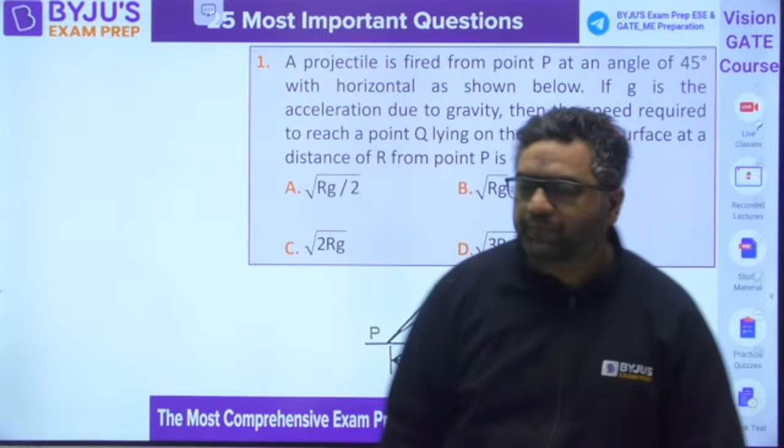So guys, now we are having the first question. This is from engineering mechanics, from projectile motion. This is the PYQ of GATE XE paper only. So you can try and solve this question.

This question says a projectile is fired from a point P at an angle of 45 degree, as shown, this angle is 45 degree. They said that if g is the acceleration due to gravity, then the speed required to reach a point Q on the horizontal surface at a distance r from the point P.

That's great, Ajay. What about you, Shreyas?

Here I would like to tell you, in this question we are going to use the formula for range. Very good Ajay, I am happy to see that. Hope you guys would be getting good marks, good rank. So I feel there was nothing in the exam which you were not aware of.

You can solve it guys and give me the answer for the first question. Then we will be starting the next one.

Yes everybody, what would be the answer for this? You need to apply the formula for range. Do you know the formula for range?

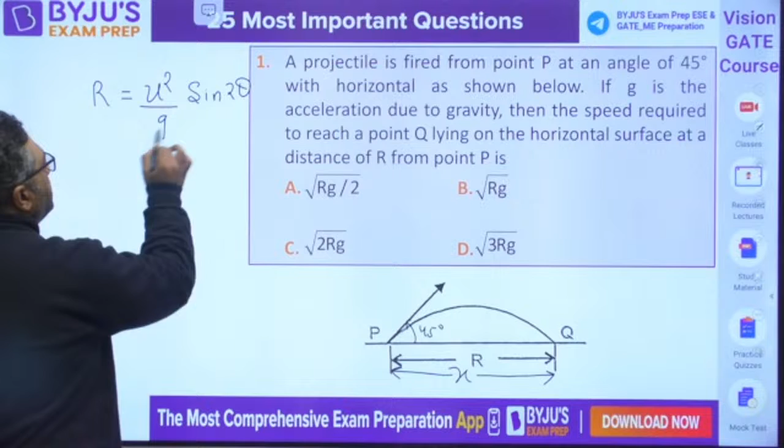So guys, when we are talking about u square sine 2 theta divided by g, it is not 2u square, it is u square sine 2 theta by g. When we are talking about velocity, they have given it as v naught. When you put this value, you would get r, which is given to us. A projectile is fired at an angle, and you need to find out the speed only. So you would be getting gr divided by sine of 2 into 45 degree.

So I feel the answer will be coming out to be what? I feel it will be coming out to be B.

Yes or no? Please tell me, guys. Is it correct? Please tell me.

And if you have any doubt in the formula of range, you can also use S equals ut plus half at square. When you use this, you know that in the x direction we are getting the range, so S comes out to be ux into t. You can write ux as u cos theta, and t is the total time of flight.

For the time of flight, you know the total height is h. Using the y direction, s equals 0, s equals ut plus half at square. When you solve this, you get the time of flight, since in the y direction u is u sine theta. So you need to find the value of t, put it here, and you get the answer as u square by g sine 2 theta.

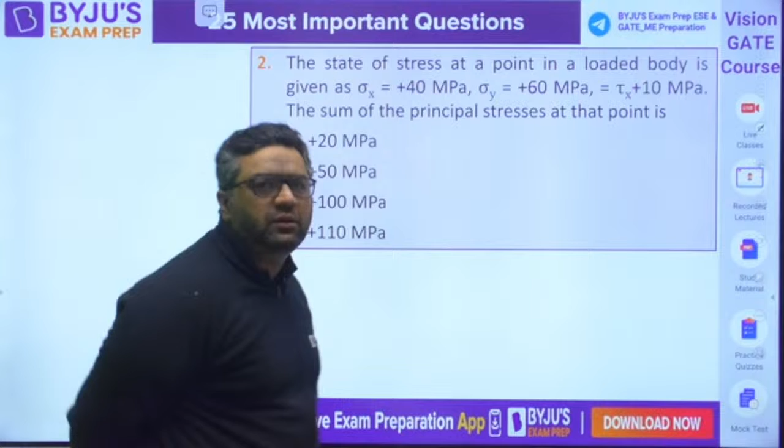Okay guys, the state of stress at a point in a loaded body given as this, you need to find out the sum of principal stresses.

Thanks, Moodley, for your wonderful words. This is just by God's grace. Whenever we are going to do this, we look at the syllabus and the previous year's questions based on that.

Jisk is saying 100, Ajay is saying C. Answer is C. How will you do it? You know that sigma xx plus sigma yy, sigma 1 plus sigma 2 equals sigma theta plus sigma theta plus 90. This property tells us that the summation of normal stresses at any two planes perpendicular to each other is always going to be the same. So 60 plus 40 is going to be the answer, which is 100 MPa. That's a very good question.

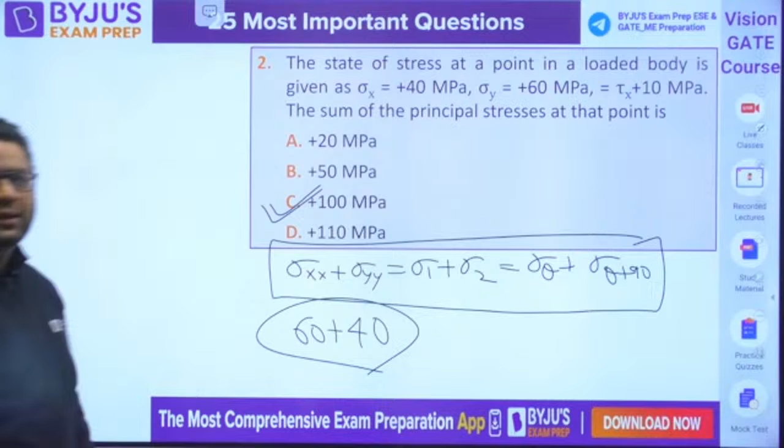Moving to the third question, this is once again from strength of material. Very good, Divit, this is strength of material once again.

An L-shaped elastic member with flexural rigidity EI is loaded as shown in the figure. The total strain energy in the member due to the loading is, these are the options.

When we are talking about this, it is going to be P square B square. Let me correct it, this is not 6, this is B - don't take it as 6, this is B. Yes, try to solve it now.

That's really great. I did not see that actually till now, but that's really great. Solve it, guys.

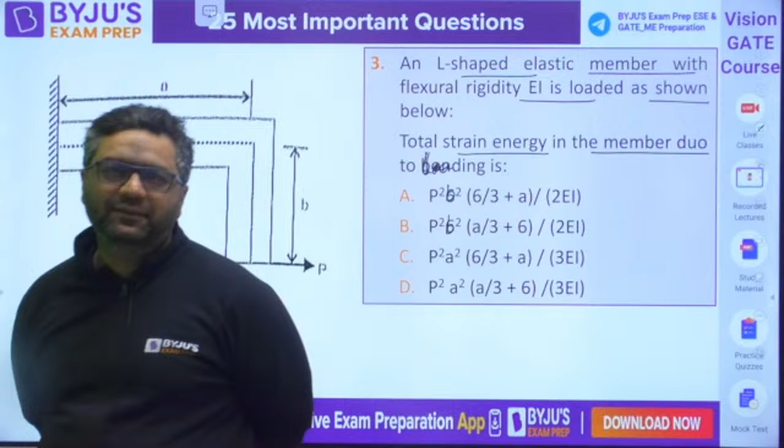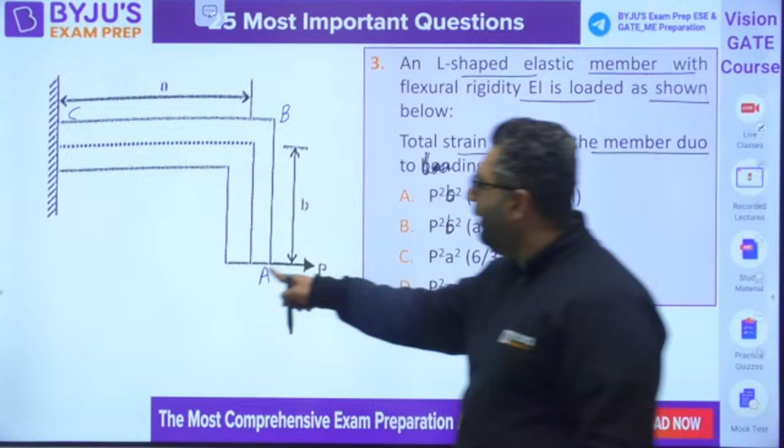Maybe in XE also you get these questions. So guys, here you need to find out the total strain energy in the member due to loading. So you know that this is A, this is B, and this is C. Strain energy total is U of AB plus U of BC. This distance is B, this distance is A.

When I solve this, you know that when you take a section like this, section 1-1, for this section M11 is going to be P into X. So you need to solve it, guys.

Then you can also have M22. For M22, you apply one force here, another force here. This and this will make a couple like this, P into B. Then you find out P into B is the moment.

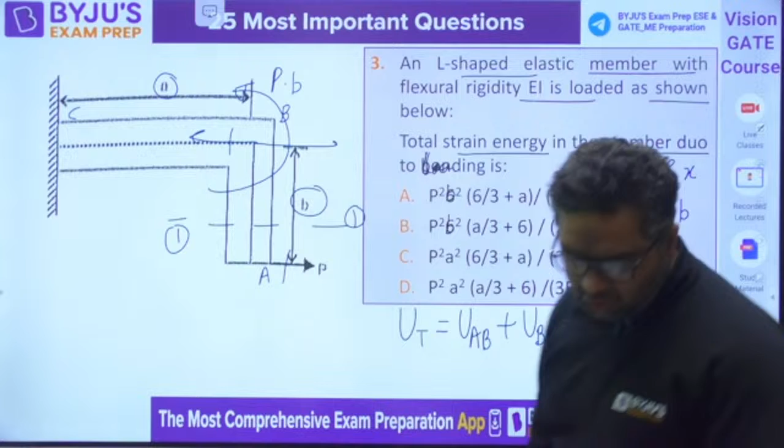And you need to find out the total strain energy, which is going to be equal to M11 square dx upon 2EI plus M22 square dx upon 2EI. Okay guys, so solve it, just solve it. I'm waiting for your answer.

Sir, I was in class. Okay sir. YouTube.

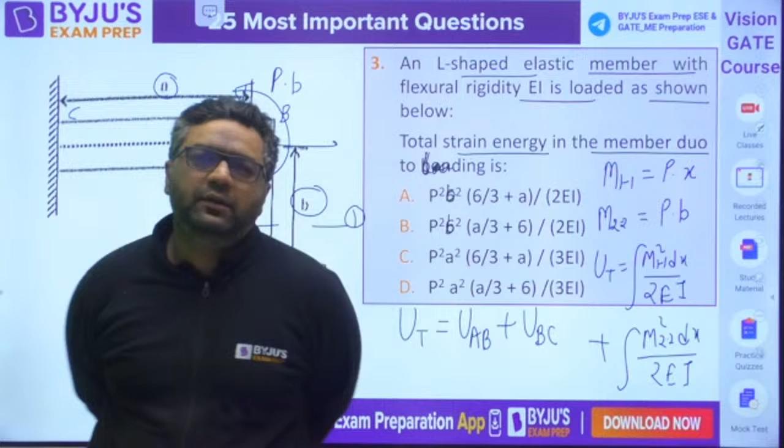Okay guys, try to solve it. As today Abhinav sir was somewhere else, that's why he couldn't join this session. So guys, can you solve it and tell me the value?

I am solving it for you. First of all, you will be finding out U total, the very first strain energy. It is for the AB part. So I am going to say bending moment is P into X. So P into X square dx upon 2EI, integration from 0 to B, plus for this it is 0 to A. This is P into B square dx upon 2EI.

Okay, so when you will be solving this, it is going to be P square outside, X square will become X cube by 3. So X cube by 6EI, integration from 0 to B, plus this is P square B square upon 2EI into X, integration from 0 to A. Now you need to solve it.

Very good, Jisk, very good. Okay, no issues dear. Actually sometimes typing errors happen.

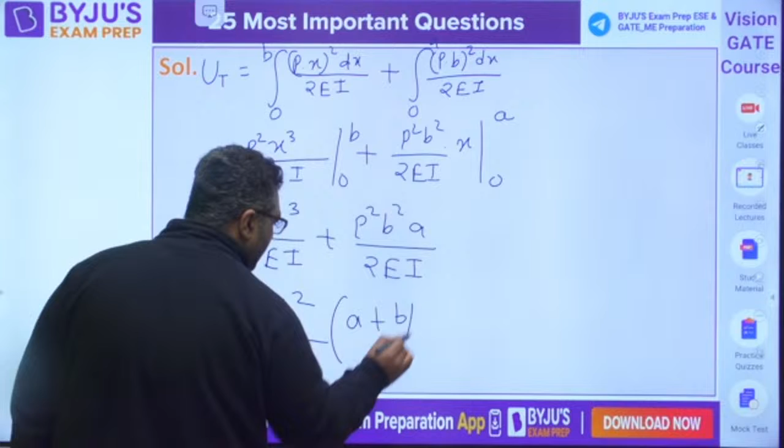So it is P square B cube upon 6EI plus P square B square A upon 2EI. So when we are talking about this, you will be getting P square B square upon 2EI into A plus B by 3. If you are getting this, this is the correct answer. It is P square B square upon, this is going to be B by 3 plus A.

Answer is A. I told you that B is here shown by 6, so the answer will be A for this.

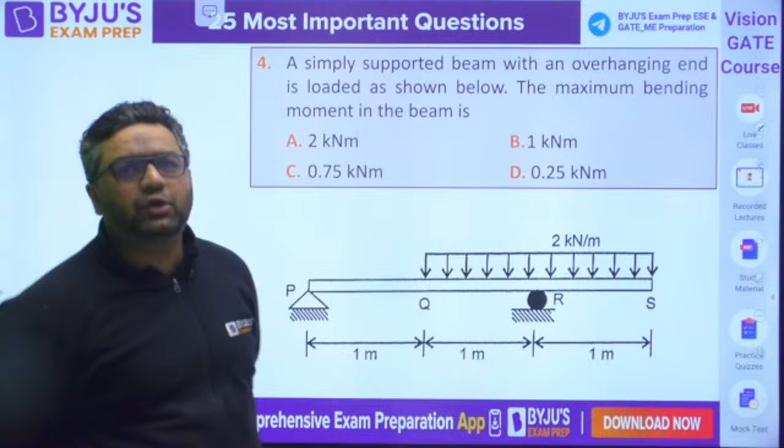First of all, I would like to give you a hint. You can find out support reactions R1, R2 first. Find out those, then you will be able to find out the maximum bending moment. This is question number 4.

That's great, Kunal.

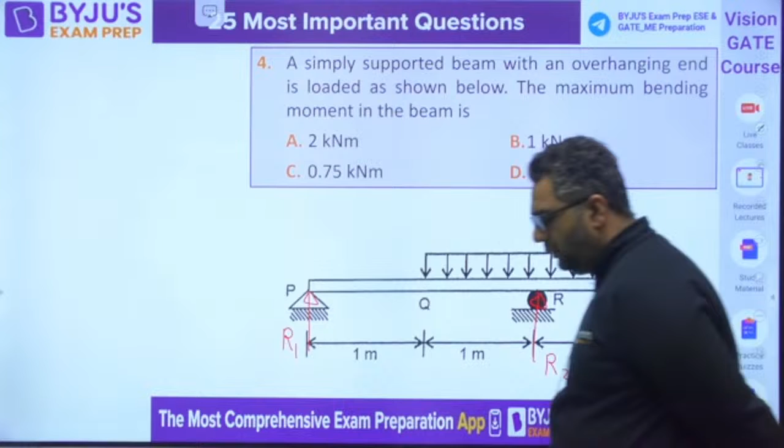Solve it, guys. Solve it, solve it, solve it. Okay, I'm giving you one more hint. R1 plus R2 is the total load.

Summation moment about P is 0. When you will do this, you will be able to get R2. It will give you R2 into 2 is equals to W into total load length, W into L, into the distance of that center from here, which is once again 2. So this will give you the value of R2. Put it here, and you will get the value of R1.

Yes, anybody? Anybody the values of R1 and R2? Yes, guys.

Okay, JISC is saying 0 and 4. So this is 0, this is 4. Is it correct? R2 is coming out to be 4. Is it correct? R2 is 4, R1 is 0. Very good. Answer is B. That is correct, JISC. B is the right answer.

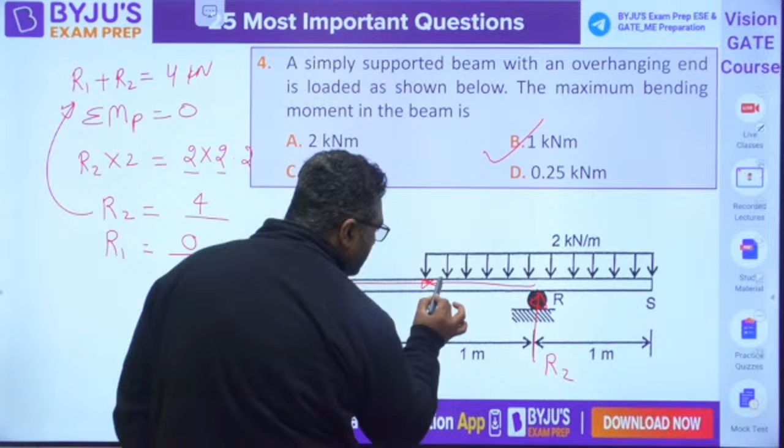So once I am getting this, first of all, now I know that from P to Q, the shear force is 0. And now you can see about this point, this side load is 2 into 1. This side load is also 2 into 1. So that is for sure about it. Whenever you are coming left and coming right, the shear force will be changing its sign and bending moment will be maximum. So when you will be finding out the maximum bending moment, it will be minus Wx square by 2. You would be getting minus Wx.

If I take the section here, just consider it like that. It is going to be x distance is 1 meter. 1 square by 2, the answer will be coming out to be 1 kilonewton meter. B is the right answer.

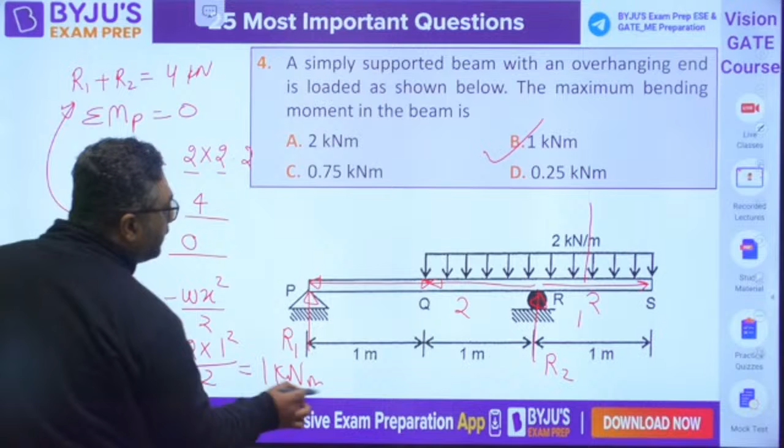Moving further to question number 5. This is a good question. Very good, Anuradha, Shreyas. Moving to the next question.

A 10 mm thick steel rectangular plate of size 100 mm cross 200 mm is subjected to biaxial stress. Sigma xx 150, sigma yy 200, as shown in the figure. The Young's modulus and Poisson ratio are 200 GPa and 0.3 respectively. And you need to find out what? They are asking you the change in thickness of the plate.

Okay, so you need to find out delta T. First of all, I would like to write down epsilon zz is delta T by T.

And you know that can be written as sigma zz by E minus mu times sigma xx by E minus mu times sigma yy by E. And you know they have said biaxial, so sigma zz is 0. It is a plane stress condition. So now very easily you can solve. This term is becoming 0, and you need to find out delta T.

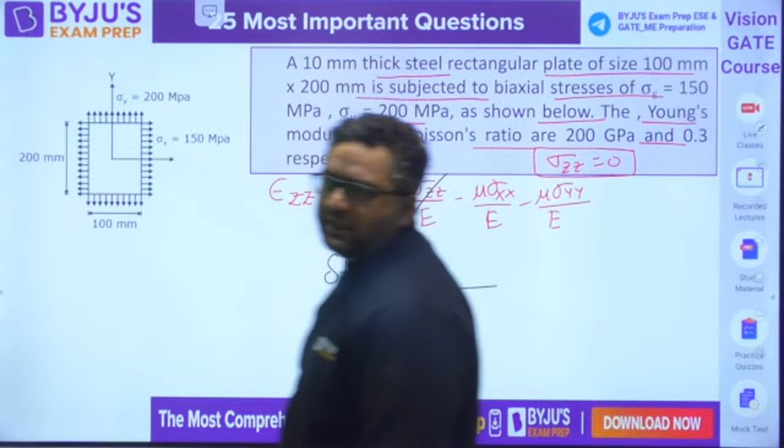Okay, this is also a previous year question of GATE XC. So solve it, guys. This is question number 5. We are still left with 20 more questions.

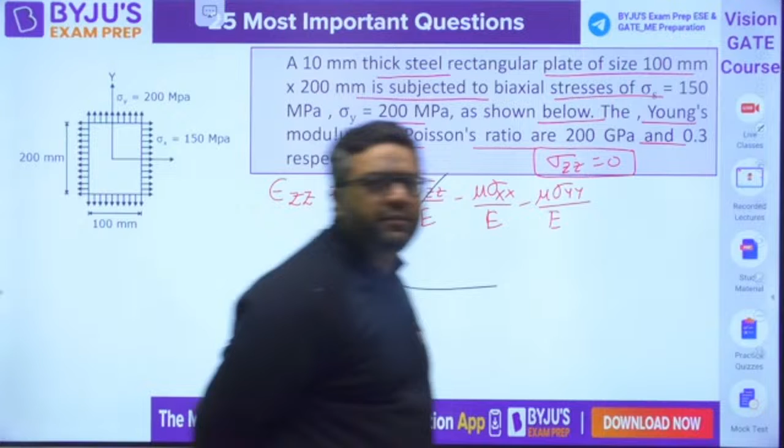Solve it, solve it, solve it. Yes, everybody. Everybody.

This type of question we have also seen in mechanical GATE 22 paper. And this question particularly is from XE PYQ.

Yes, very good. Solve it, solve it, solve it, guys.

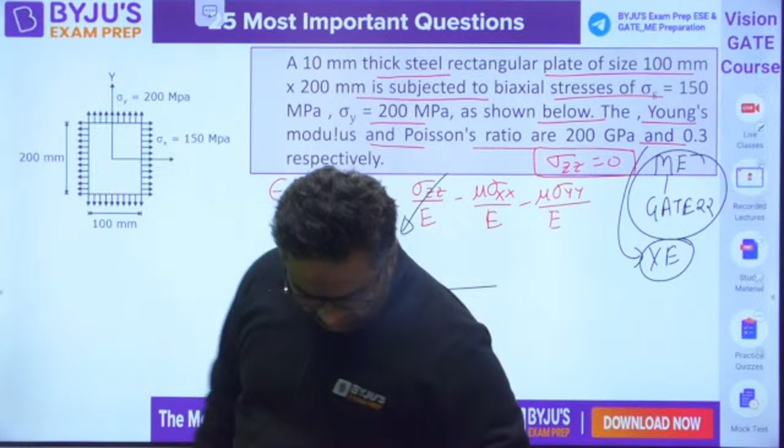Yes, 5.25 microns. Okay, so let us see. I have also solved it for you guys, and the answer is coming out to be 5.25 microns, which is correct only. So I will be putting the values here.

Delta T is going to be minus mu times, where minus mu will be coming common and divided by E will also be common. 200 into 10 to the power 3. You can write sigma xx plus sigma yy, that is 200 and 150. So 200 plus 150. When you solve it, it will come out to be 5.25 microns, because this will also be multiplied with the thickness which is already given as 10 mm. So the answer will be 5.25 microns. For that, B is the right answer.

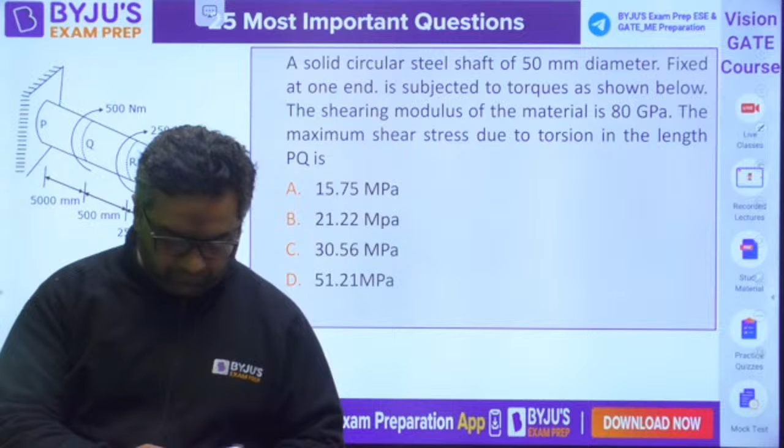Moving to question number 6, guys. This is from torsion. Solve it, guys. This question is from torsion.

A solid circular steel shaft of 50 mm diameter fixed at one end is subjected to torques as shown below. The shearing modulus of the material is 80 GPa. The maximum shear stress due to torsion in the length PQ is what you need to find. Let us take this to be the first part. You know the maximum shear stress formula is 16T by pi d cube. Here the torque required is the torque in PQ length. So solve this question, guys, and you will be able to answer it. Everybody, please solve it.

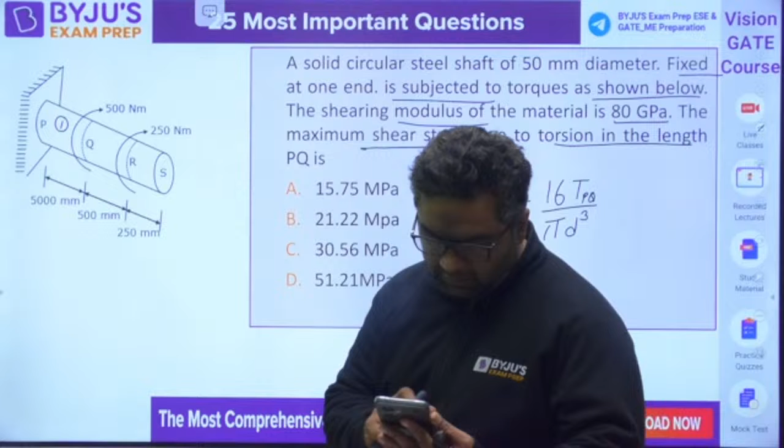Yes, everybody. Okay Kunal, are you saying the answer B for this question? This is a torsion question, please solve it carefully. So what is the answer, guys?

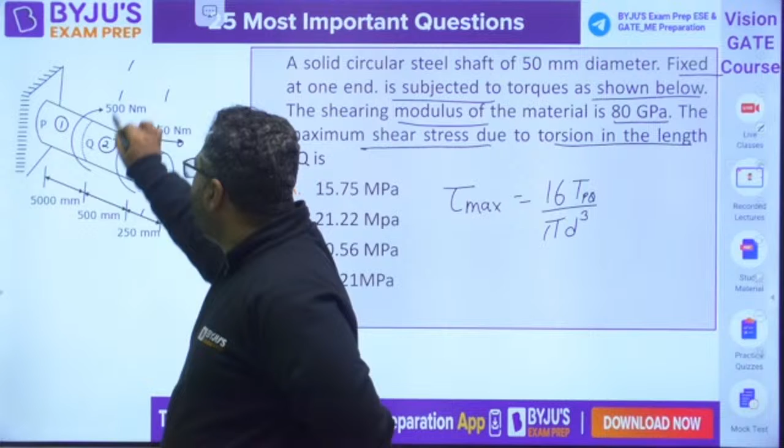So you know that if you take this as section 2, this as section 3. If you take this section to the right hand side, there is nothing. If you take this as section to the right hand side, it is 250. If you take this as section to the right hand side, there is 750. So first of all, TPQ is 750. I already told you direction plus minus does not matter here. It is 750 Newton meter, and you are given the diameter to be 50 mm.

So you will be saying 16 into 750 divided by pi into 50 cube, and you would be getting the answer. This is multiplied by 10 to the power 3 to convert Newton meter into Newton mm, and that will give you the answer in MPa.

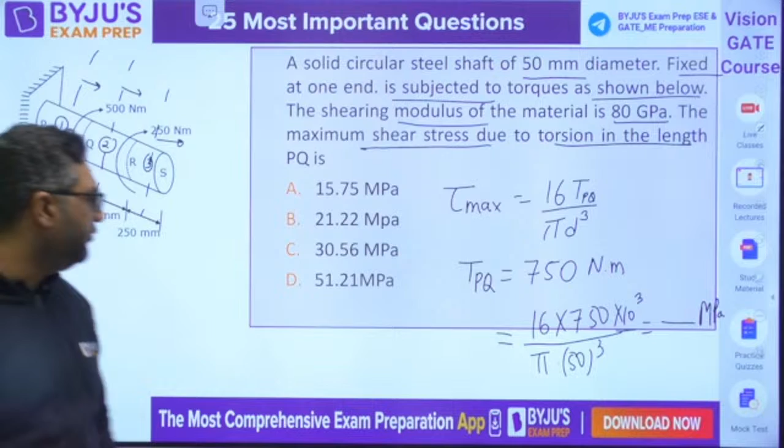Okay, Kunal is saying C to be the answer. Divit is saying C to be the answer. Abhi is saying C to be the answer. Okay, Shreyas is saying 15.75. So the answer will be C for this, 30.56 MPa. I feel Shreyas, you got your mistake. Answer will be C for this, 30.56 is the right answer. Very good, Ajay. Very good, Jisk.

So moving further, guys, this was a good question from torsion. I feel some of you made the mistake in finding the torque in that member.

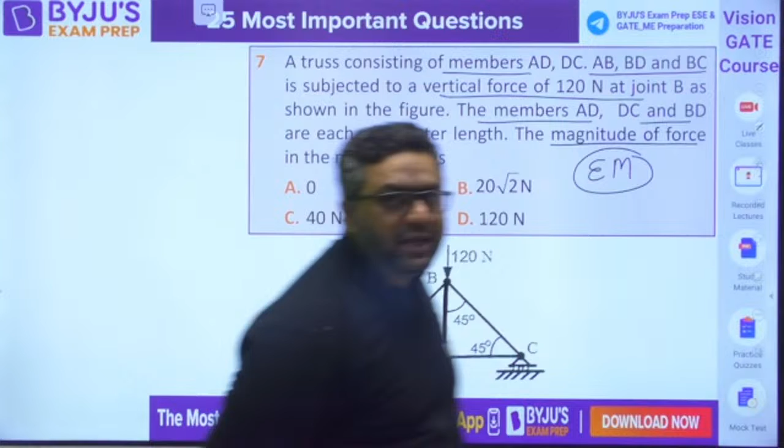This is a very simple question, question number 7 from a previous year's GATE question. You can answer it very easily, very normally. So just try to solve it. This is engineering mechanics, guys.

We have seen that solid mechanics includes engineering mechanics, strength of materials, and vibrations of a single degree of freedom system. So this is the syllabus, and sometimes in previous years Coriolis component of acceleration is also asked, because that can also be considered part of engineering mechanics.

Tell me guys, what would be the answer? Jisk is saying 0. Okay, what about others? Shreyas, Kunal, Divit, Abhi. I want answer from all of you guys. Yes, everybody.

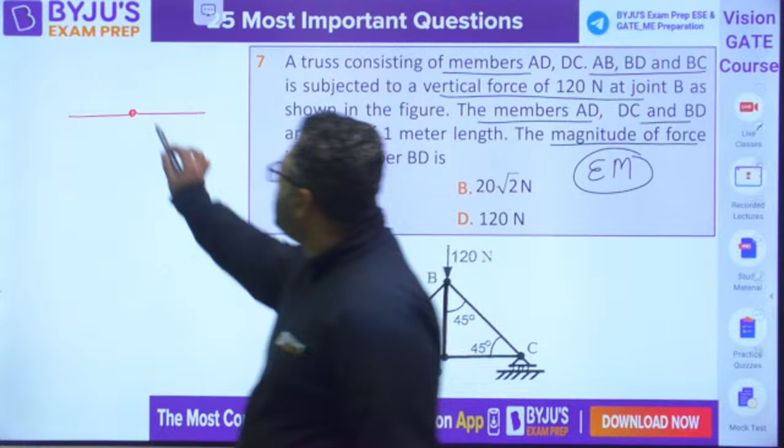Answer is 0. Correct. You can see there are some rules. If we are having two collinear members like this, and at this point there is no force acting, then in the third member the force is going to be 0. Why? Because force in this member and force in this member are equal, so who will be balancing the force in this member? So the answer is, this is a zero force member.

If you are confused about that, I have taken a session on YouTube on trusses. You can watch those sessions of mine, you will get all the ideas about zero force members. Answer will be A for this.

Moving to question number 8. This is from Coriolis component of acceleration, guys. A rigid link PQ is rotating and you are given a slider. Direction of velocity of the slider is given, and rotational angular speed is also given. You just need to solve it now.

Solve it, guys. Solve it, everybody. You need to see which of the following is giving the right direction for the Coriolis component of acceleration.

So this is also a previous year question. That's why I said you need to be prepared for engineering mechanics, plus vibrations for a single degree of freedom, plus strength of materials. And in strength of materials also include theory of failure, because they are not considering that in machine design.

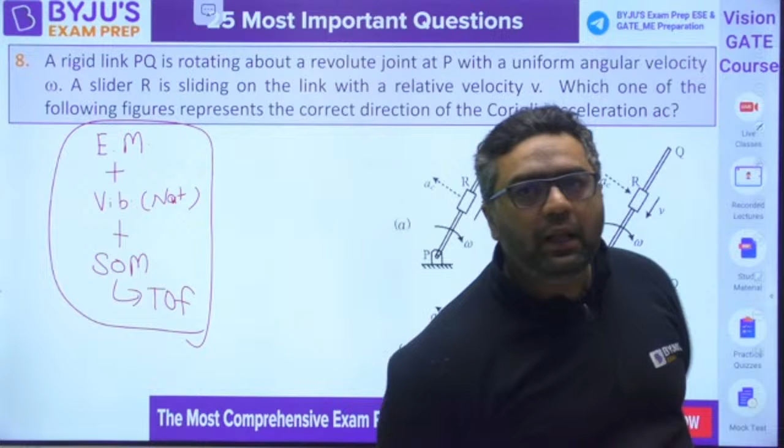Okay, no issue Ajay. Abhi, now solve this one. The previous one you can see later on. Okay. Ajay is saying the answer is C. Divit was also saying C.

First of all, I would like to tell you that we need to rotate the velocity vector by 90 degrees, and I am making a watch first of all. You can see this is the direction of velocity given like this, and angular speed is given as clockwise. So when I rotate this 90 degrees clockwise, it will come here somewhere. So this should be the direction of Coriolis for this case.

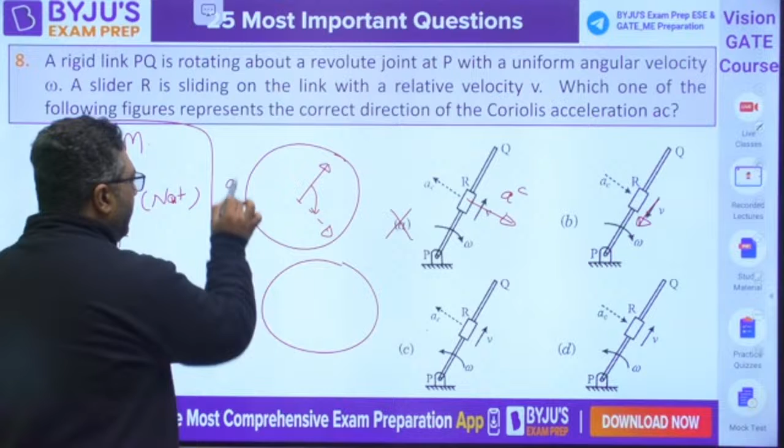So obviously this is a wrong option. If we are given velocity in this direction, and you know this is clockwise, so once again if you consider the clock, this is for A, this is for B, you know this is the velocity, the clock will go like this 90 degrees.

So in that case it should be in this direction, so that is why this is also wrong. Here if you see, this is given anti-clockwise, so for this the clockwise was here, so anti-clockwise is here, so this is the correct direction. And if you see option D, it is anti-clockwise, so for anti-clockwise it should come here, but clockwise is there, so D is also wrong. Answer is C for this. This is Coriolis component of acceleration.

Moving to the next question, question number 9. This is from strength of materials, also a previous year's question. They are asking you about the Mohr circle. Very easy question. You will see the cutoff last year also was more for the XE paper because the paper was easier. So that depends—if the paper is easier, maybe this time also the cutoff is going to be more than mechanical for that. But guys, the best thing here is you need to concentrate on fewer subjects.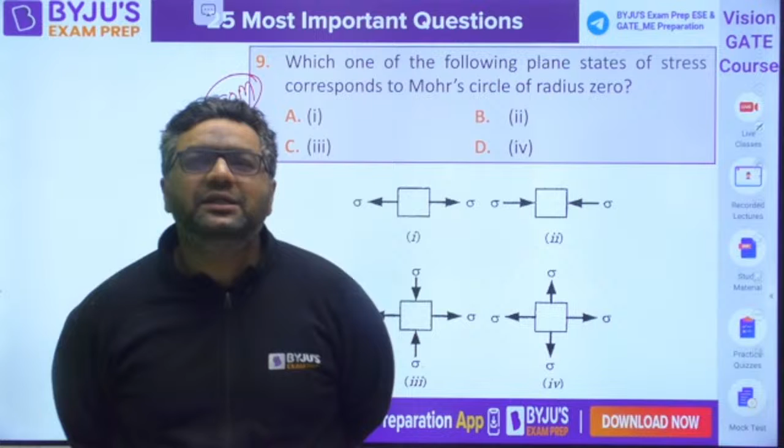So JISC, which option is correct?

They are asking which one of the following plane state of stress corresponds to the Mohr circle radius 0. First of all, I would like to tell you, they are talking about the Mohr circle converting into a point. This is not a case of pure shear, this is a case of zero shear because the radius is 0.

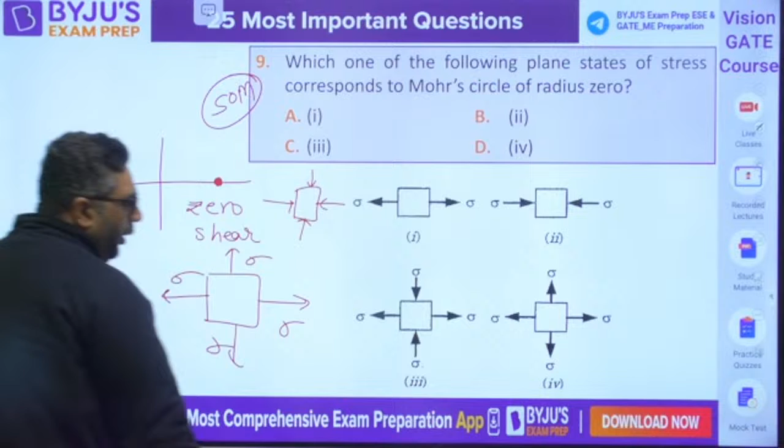Sigma, sigma, sigma, sigma, or the same can be in compression, sigma, sigma, sigma, sigma. D is the right answer. Okay, for this D is the right answer. I feel you understood just your mistake, avoid this mistake in the exam.

This is from theory of failure, strength of material, question number 10. So for ESE paper, you cannot ignore the theory of failures. Question number 10: maximum shear stress theory for material yielding is known as. They have just asked the name of the theory.

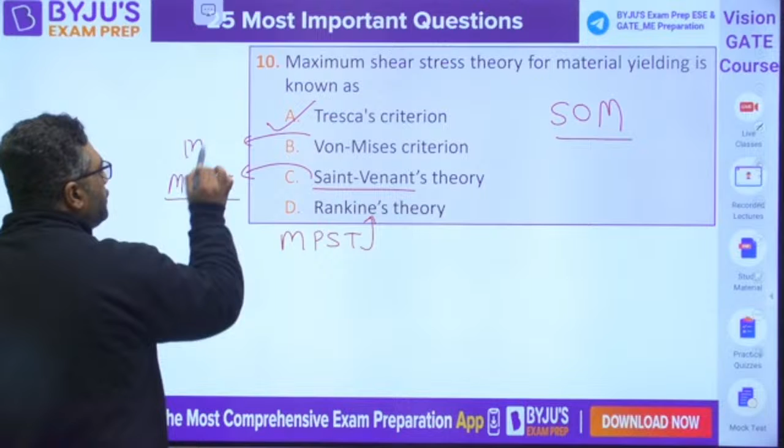That maximum shear stress theory was given by Tresca, von Mises, Saint-Venant or Rankine. Okay, JISC is saying A, Abhi is saying D. Okay, Divit is saying A, answer is A. So I would like to tell you here, maximum principal stress theory was given by Rankine, and Saint-Venant have given maximum principal strain theory. Von Mises have given maximum distortion energy theory. So the answer will be A for this.

Moving to question number 11, guys, this is a numerical answer type question, and they are saying in a cantilever beam of length 2 meters, the shear force along the length is given as 5x square, where x is the distance in meters measured from the fixed end. The magnitude of the load intensity at the midspan of the beam is?

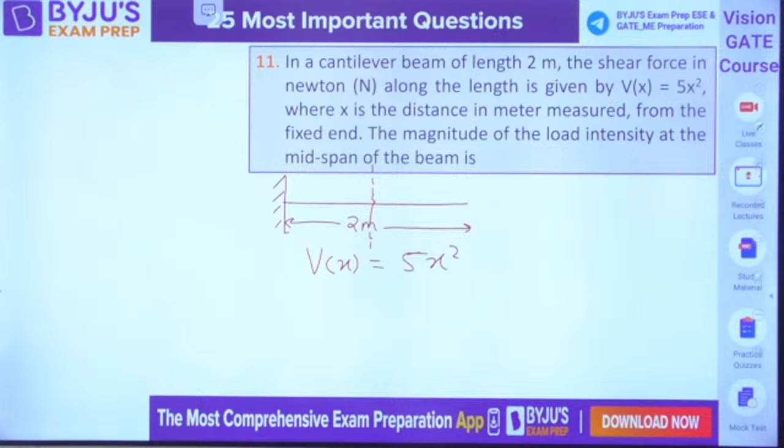Yes, guys, try to solve it. Okay, try to solve it.

First of all, they have given Vxx. You know that dV by dx is Wxx. So if you are saying dVxx, okay, if you are going to talk about Wxx, it is going to be 5 into 2x. This will be 10x. They are asking you the magnitude of load intensity. When you will put x is equal to 1, you will be getting the value as 10 Newton.

But I feel whenever they are giving this type of question, they can also ask you bending moment, they can also ask you load intensity, and it would be a good question if they are saying that we are having a cantilever beam and that load which is 2x square is here, x is from the free end. Okay, and if they ask at that time where is the maximum bending moment, that kind of question would be a better one. Okay, but this is the PYQ, you know that.

Moving to question number 12 from columns now. I expect everybody would be able to answer this question very easily. Okay, this type of question is also coming in the engineering services paper as well. So try to solve it, guys.

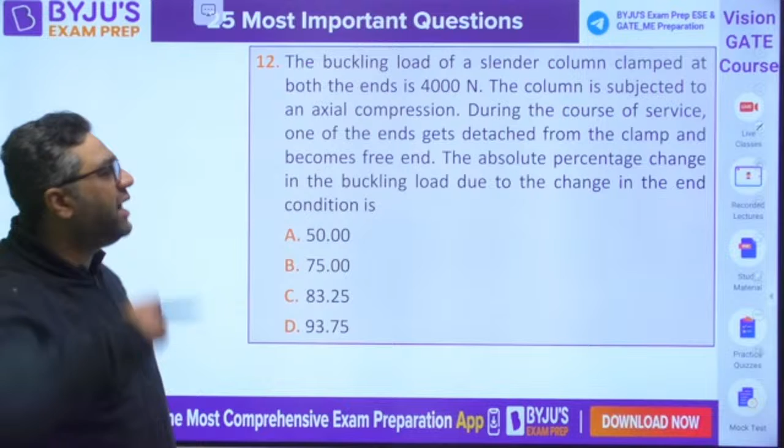What they are saying is the buckling load of a slender column clamped at both ends is 4000 Newton. This clamped means hinged at both ends. So they are saying that if we have a case like this, when it is hinged at both ends, then the load carrying capacity is 4000 Newtons. And they are saying the column is subjected to axial compression. During the course of service, one of the ends gets detached from the clamp and becomes a free end. The absolute percentage change in the buckling load due to the change in the end condition is? Okay, so when they are saying clamped at both the ends, yes.

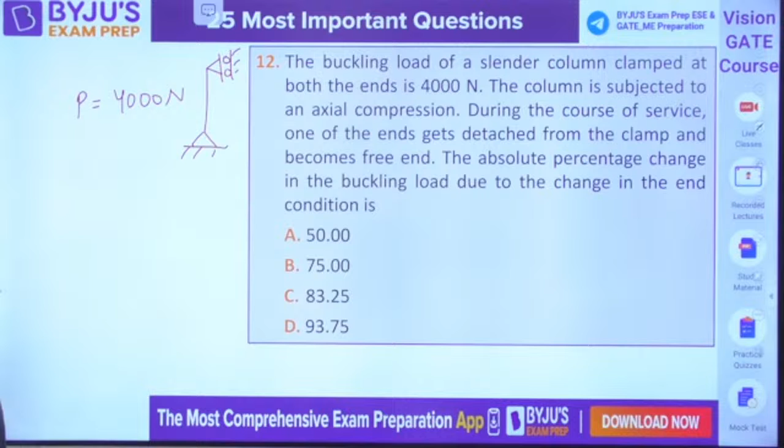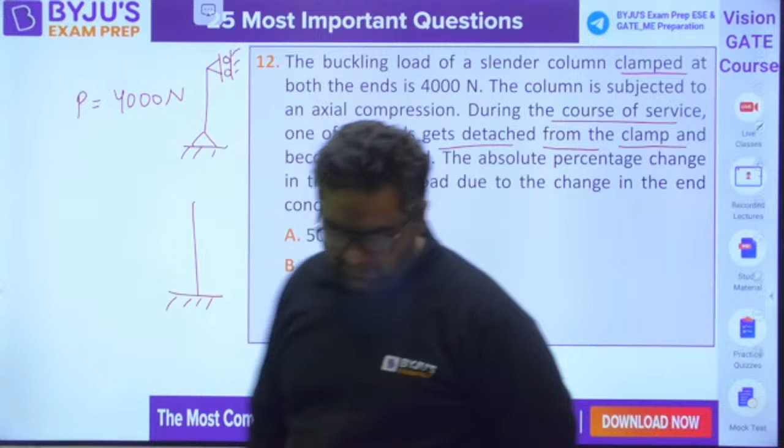So try to solve this question, guys. Try to solve this. Whatever they are saying, according to that, the second case should be this. They are saying clamped at both ends is 4000 Newton. The column is subjected to an axial compressive load during the course of service. One of the ends gets detached from the clamp and becomes a free end. Yes, guys, solve it.

So when you will be finding out the first one: pi square EI upon L square. Pi square EI upon 4L square. So P2 minus P1 by P1 into 100 gives 75%.

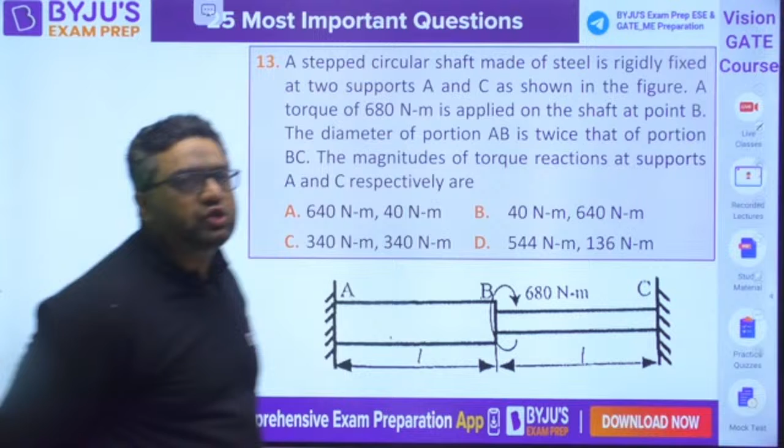Very good, guys. Moving further to question number 13. This is torsion support reaction calculation, a previous year question, question number 13. So we have already crossed 50% of the questions. Solve this one, guys. Solve this one. Then we are moving further.

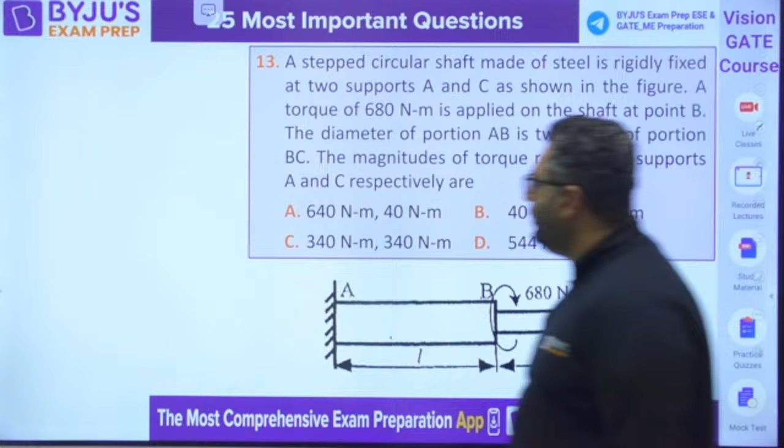Everybody, a stepped circular shaft. You need to find out support reaction, but first see what are the given things. They said 680 Newton meter is the load, and the diameter of portion AB is twice that of BC, made up of steel. So G is same, J is not same. So the shortcut is not applicable.

You will assume this to be TA, and this to be TC, and you have to make the equations: TA plus TC equals T, equation number 1, and theta AB plus theta BC equals 0. So you would be writing TAB, LAB, GAB, JAB, minus TBC, LBC, GBC, JBC. These are the two equations after solving which you will get TAB and TBC.

Solve it guys. TAB is nothing but plus TA, and it is nothing but minus TC. Solve it guys. Are you getting 640 and 40? 640 and 40, okay, everybody is getting 640 and 40.

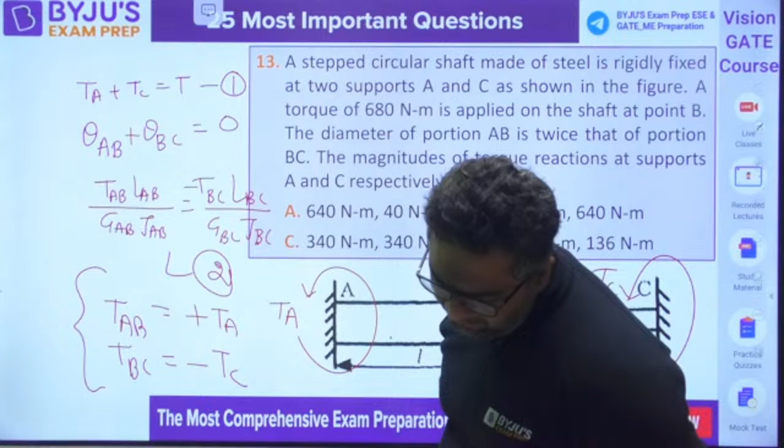Let me see, first TA plus TC equals T. Let me write it: TAB is TA, length is equal, pi by 32 d to the power of 4 minus, this is TA minus 680, then LG pi by 32 2d to the power of 4. They are saying AB is twice, the diameter is twice. GG cancel out, LL cancel out, D to the power 4 will cancel out, pi by 32 is also cancelled out. So we get TA equals TA plus 680 divided by 2 to the power 4. So we get 17 times of TA, 680, TA is 40. So TA is 40 and 640.

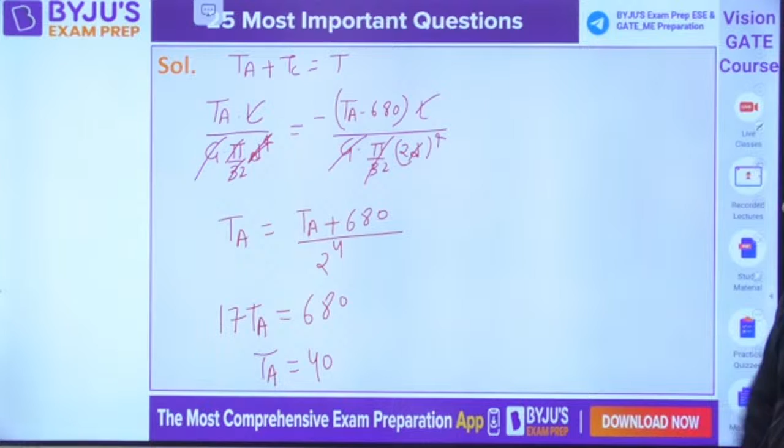They are asking the magnitude of torque reaction at A and C. I feel 40 and 640, B is the right answer. Have I done it correctly? Okay sorry, I feel I have kept the diameter opposite. Yes, A is the right answer because I have kept diameter of this as doubled.

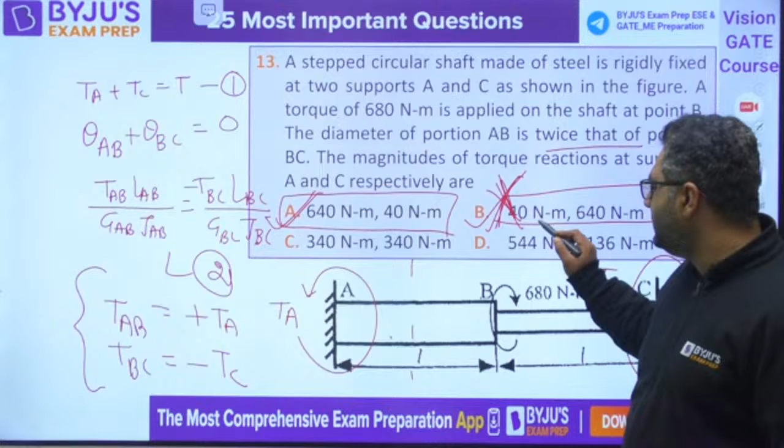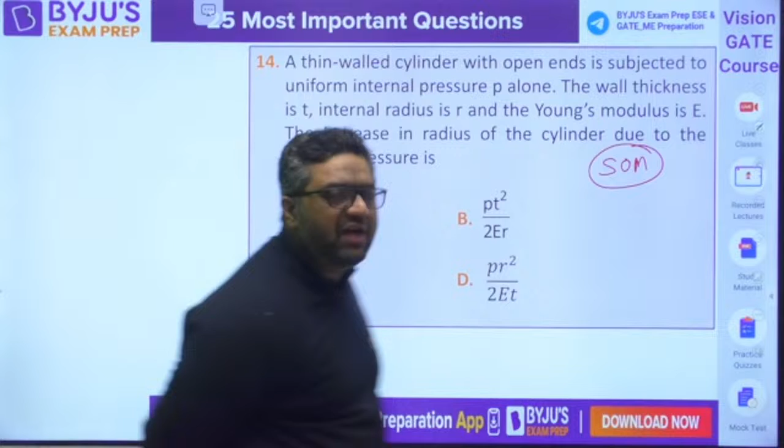They're asking the increase in the radius of the cylinder due to internal pressure. So they are talking about a thin-walled cylinder with open ends. This is a very important word which will help you find out the things. Both ends are open. So this is the key point of this question, try to solve it.

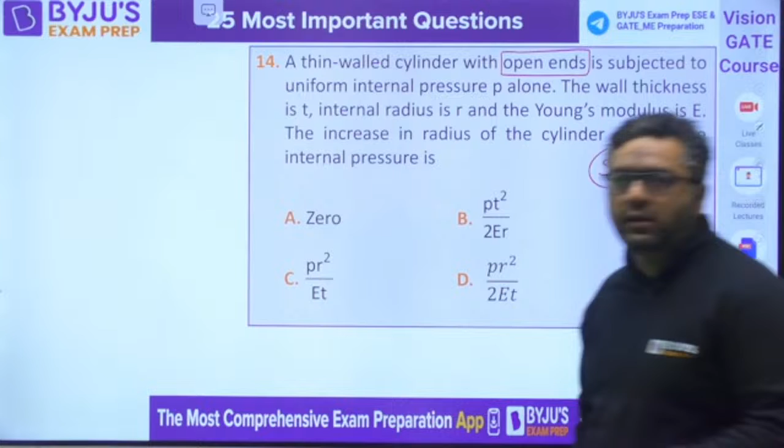I'm solving it for you guys. First you need to understand that circumferential strain can be written as sigma circumferential minus mu times longitudinal stress upon E. But whenever both ends are open, longitudinal stress is 0. So epsilon circumferential can be written as delta of 2 pi r divided by 2 pi r, which is the change of circumference over the circumference, equals sigma C upon E. So 2 pi will get cancelled out and this will be delta r by r. Sigma C is PR by T.

You need to find out the change of radius, they have asked change in radius. It is PR square upon ET, coming out to be. This is a thin walled cylinder, so PR square upon ET, C would be the right answer for this.

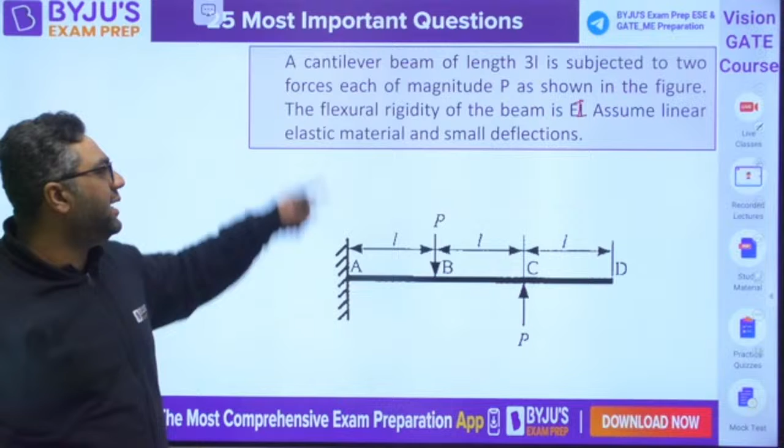Very good guys, moving further to question number 15. This is a good question again, try to solve it. A cantilever beam of length 3L, L and L, subjected to two forces each of magnitude P. The flexural rigidity of the beam is EI. Assume linear elastic material and small deflections.

Which one of the following statements is true? The magnitude of bending moment in portion AB is 0. Magnitude of bending moment of AB is PL. Magnitude of bending moment in portion AB is 2PL. You need to find out the bending moment in this AB part, that is what they are asking. If you are able to get this, you will get the answer.

Okay, options are: option A, 0; option B, PL; option C, 2PL; option D, 0 to PL. Solve it guys, options are in front of you.

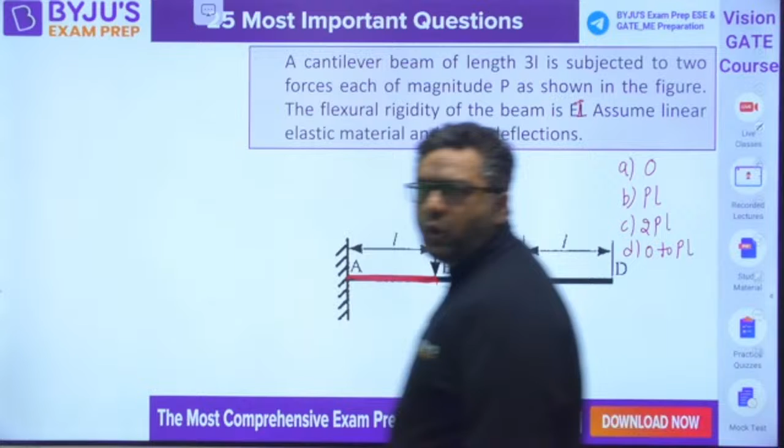What would be the answer, guys? This is question number 15. Ajay is saying B, Jisk is saying B. What about others? Everybody please tell me the answer. Jisk is saying the answer to be B.

So guys, first of all, in CD there is no load. So if you are going to talk about the bending moment, let us say this is section 1-1. You can directly say M11 is 0. And if you are going to talk about M22, it would be coming out to be what? I am taking the distance from here, so it would be P into X minus L.

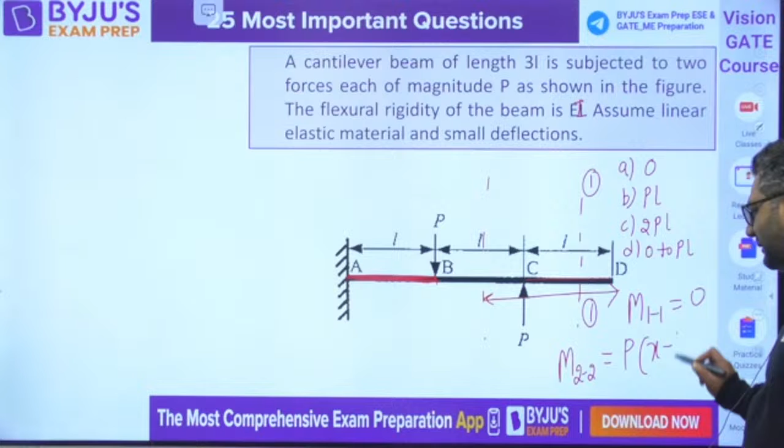This is sagging moment, so plus is coming. If I take a section at 3-3, bending moment at 3-3 will be P into X minus L, minus P into X minus 2L. If you see here, Px minus PL minus Px plus 2PL. Px cancels out, answer is PL. It is independent of X. So answer is B.

Answer is B for this. Moving to question number 16 for the same data. For the same data, I am making the figure. You need to find out the deflection at B.

You need to find out the deflection at B. For that, what will you be doing? This is the beam, one force is already acting here. You will make the effect of this force P. When you make the effect of this force, you can very easily do this.

So what is the effect of this P? You would say this is the force. You will make one force here, one force here. This and this will be making the couple. So one force P here, one moment P into L here. This is A, this is B. I feel we can very easily find out the deflection at B, coming because of just P into L, because the effect of this and this will get cancelled out.

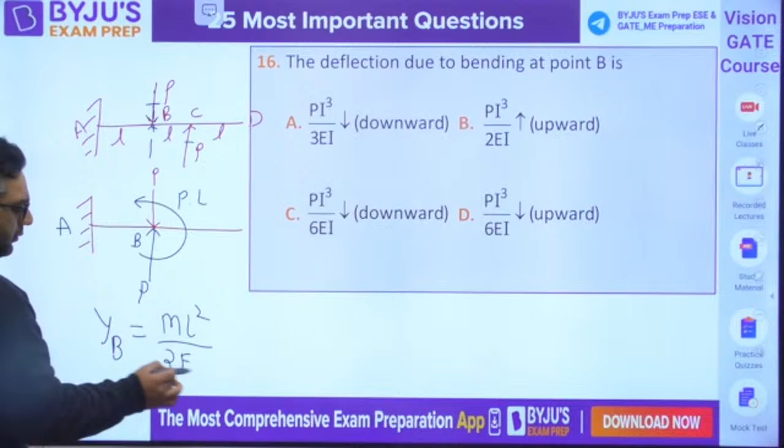You know the formula, M L square upon 2EI. M is PL, you can solve it very easily. Here M is nothing but P into L. So it is P into L square upon 2EI, which gives PL cube upon 2EI. B is the right answer.

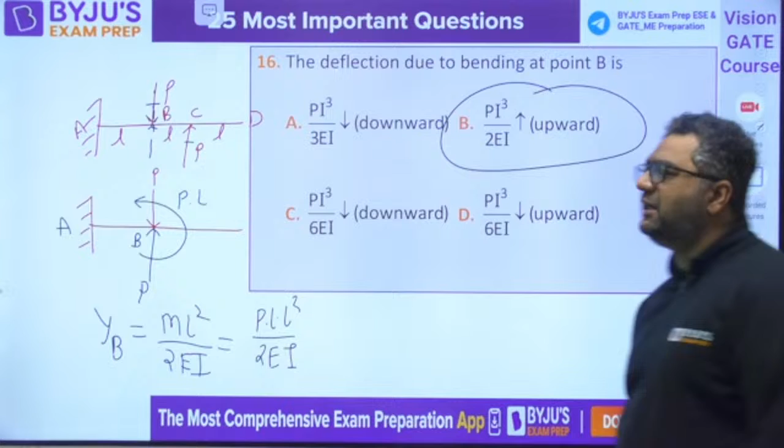Everybody got it? Moving further to question number 17, guys. Question number 17 is this: a steel bar of rectangular cross section is heated uniformly and the rise in temperature is delta T. The Young's modulus is E, Poisson ratio is mu, coefficient of thermal expansion is alpha. The bar is completely restrained in the axial direction.

I am making the question in front of you. There is a cubical bar in which the temperature is raised by delta T. Young's modulus is E, alpha is the coefficient of thermal expansion, delta T is the change in temperature, mu is the Poisson ratio. They are saying we have restrictions from all sides like this, such that the thermal stress developed in the bar along the direction, you need to answer if it is restrained in the axial direction and lateral direction, meaning we are not allowing any strain in any direction. What should be the answer, guys?

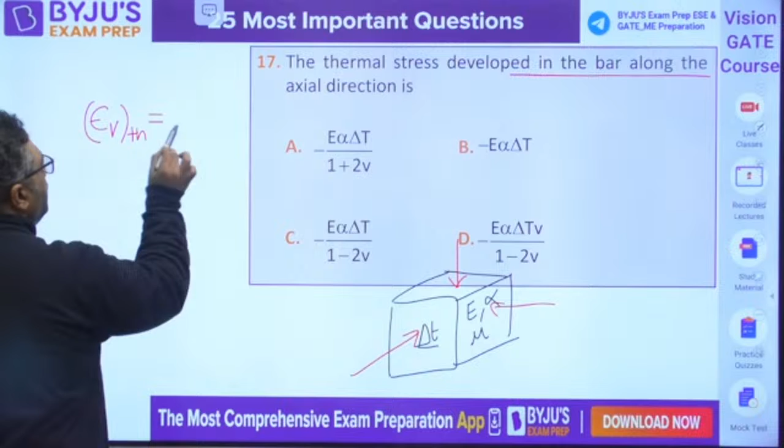If there is no strain in any direction, you can say: volumetric strain because of free expansion, you will find out, and volumetric strain because of axial compression, you will find out, and volumetric strain because of thermal expansion and because of sigma component, this should be 0. Just equate it to 0 and you will get the answer. I have given you the hint. This is a beautiful question, I have done it many times in the classes, so everybody would be aware of this.

Jisk is saying the answer to be A. What about others? Abhi is saying B, I feel so. Yes, what should be the answer, guys?

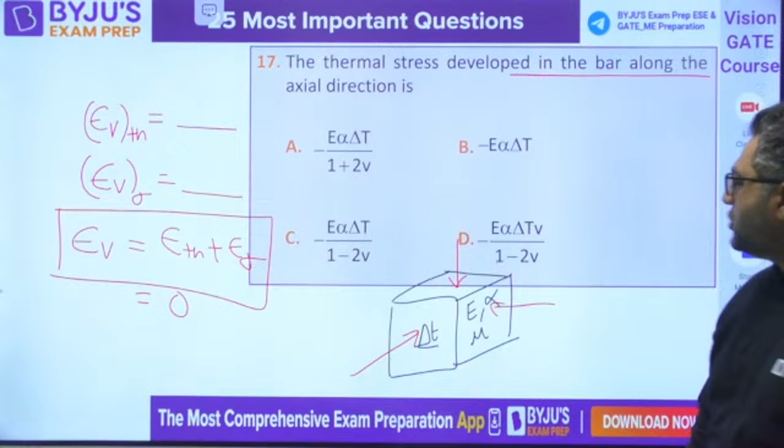Yes, guys, so first of all I would like to tell you, due to thermal expansion, it is XX plus YY plus ZZ, which is 3 times alpha delta T. When we are talking about because of sigma, it is 1 minus 2 mu upon E times sigma 1 plus sigma 2 plus sigma 3, which is minus 3 sigma because it is compressive in nature. You know the summation of these three is 3 alpha delta T. This is minus 3 sigma into 1 minus 2 mu upon E. That will be 0.

Sigma will come out to be 3 alpha delta T into E divided by 3 into 1 minus 2 mu, which simplifies to E alpha delta T divided by 1 minus 2 mu. This is the magnitude, and it is compressive in nature.

So the answer is C for this. Did everybody understand the mistake? All three stresses are compressive, sigma, sigma and sigma. That is why we use the formula 1 minus 2 mu upon E, multiplied by sigma XX plus sigma YY plus sigma ZZ. So all of them are minus sigma, minus sigma, minus sigma.

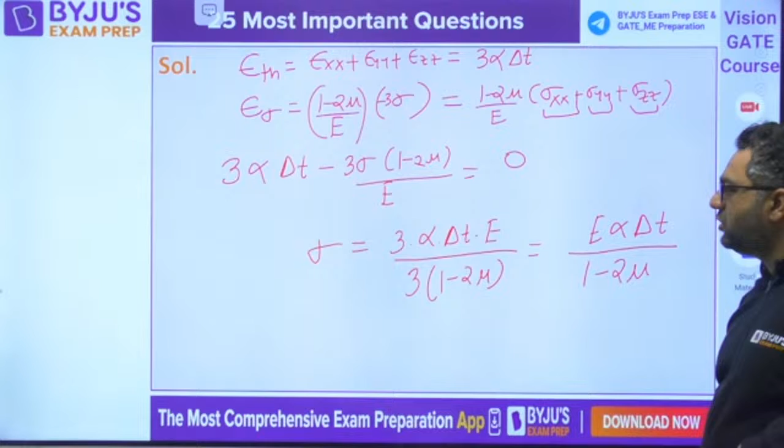So the answer will be C for this, and the same data has one more question. Assume that the bar is allowed to deform freely in the lateral direction while keeping the axial direction restrained.

In the previous case, sigma came out to be E alpha delta T divided by 1 minus 2 mu. I am taking this as sigma 1. Now they are saying consider a case where we apply the restriction in the X direction, but in the other directions it is free to deform. And they are asking for the percentage change in the magnitude of axial thermal stress.

So you need to find sigma 1 for this new case. What is the sigma for this case? You know you need to find it out, and then calculate the percentage change. Let us say this is sigma, and this is sigma dash. So you need to see what is the percentage change. Try to solve it, guys.

So it is sigma dash minus sigma, divided by sigma, into 100. I am giving you the hint. If you have a bar fixed in the axial direction, sigma is E alpha delta t. So for our case, sigma dash is E alpha delta t, and sigma is E alpha delta t divided by 1 minus 2 mu. The value of Poisson's ratio is given to us.

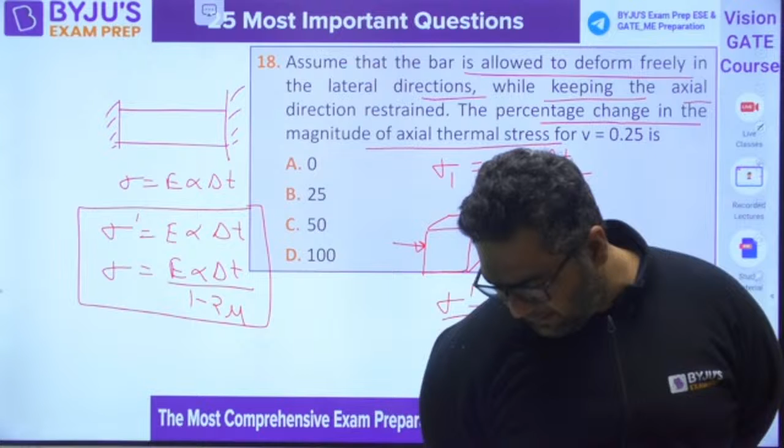You will get both values, put them here and get the answer. Some of you gave the answer as 25%. Let me check. When you put 0.25 into 2, it is 0.5. 1 minus 0.5 is 0.5. So it is going to be 2 times.

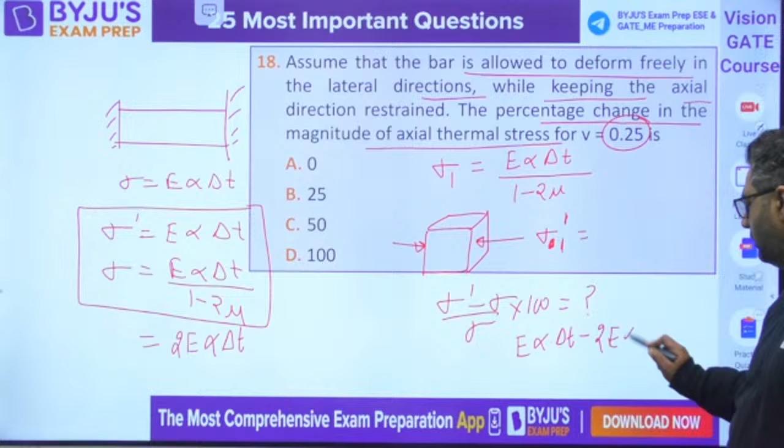I feel it should be 50%. C is the right answer. This thermal stress question confused everyone. The answer will be C for this.

So guys, moving further to question number 19, once again it is from column. 6 more questions are left, and I feel these questions will be easier. The Euler's buckling load for a long cylinder column, fixed end condition, has been given for this condition.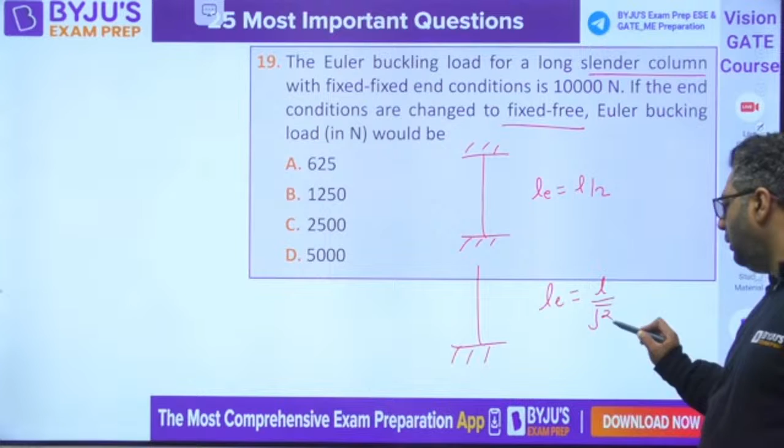You know, for this condition, LE is L by 2. If the end conditions are changed to fixed free, LE is L by root 2. Sorry, LE will be 2L for that case. Solve it, guys.

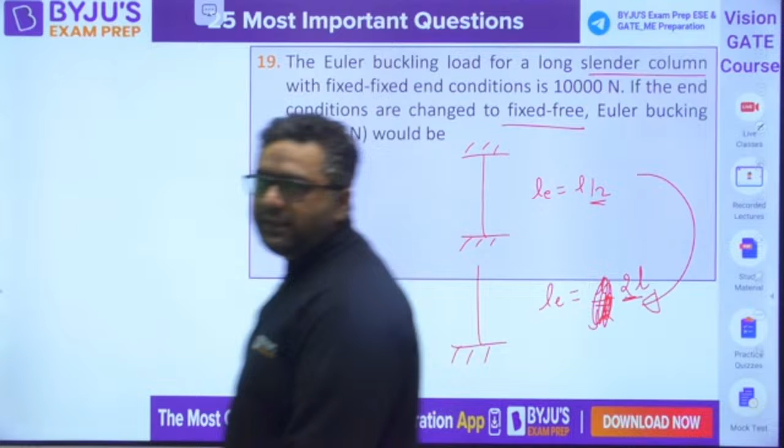Six more questions to go, guys. This one is fixed-free, fixed-free. LE is 2L, not L by 2. Solve it carefully, you remember there are 4 cases: LE is L by 2, LE is L by root 2, LE is 2L, and LE is L.

So when solving this, they are asking for the Euler's buckling load now. If you have pi square EI, with L as L by 2, so L square becomes 4. If this first case is 10,000, then the second case is with 2L, giving pi square EI upon 4L square. That you need to find out. I feel it is 1 by 16th. A is the right answer.

Very good, guys. Moving to question number 20. This question is from boundary conditions. If anyone remembers, when I was teaching deflections, I always told you about the boundary condition. Try to solve this question, guys.

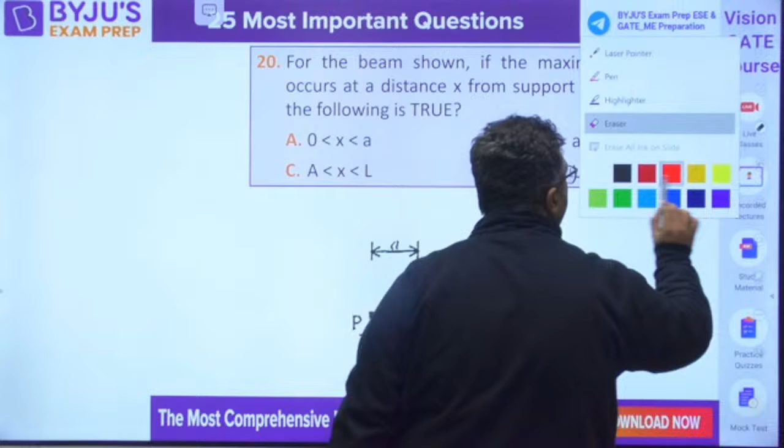If we are given a beam like this with force, this is not symmetrical loading. You need to find out where deflection will be maximum. Deflection is always coming to be maximum where loading is not symmetrical. This is the mid span. If loading were symmetrical, then maximum deflection occurs at mid-span. But if loading is not symmetrical, then maximum deflection occurs somewhere in between these two points.

So the answer for this should be A to L. This is A to L. Is this clear for everyone? The answer should be C for this.

Okay guys, moving further, last 5 questions in front of us. Question number 21, they are asking you about the center of Mohr's circle.

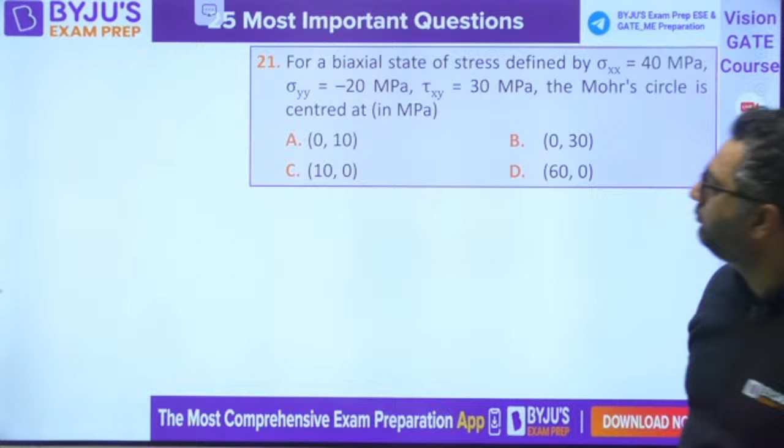Direct formula you can use. They are asking you the center of Mohr circle. For a biaxial state of stress, sigma xx 40 MPa, sigma yy minus 20 MPa, tau xy 30 MPa, the Mohr circle is having a center at. Where will be the center for Mohr circle, guys? Center of Mohr circle is given as sigma star comma 0, where sigma star equals sigma xx plus sigma yy by 2, that is 40 plus minus 20 by 2. Answer comes out to be 10, 0. C should be the right answer.

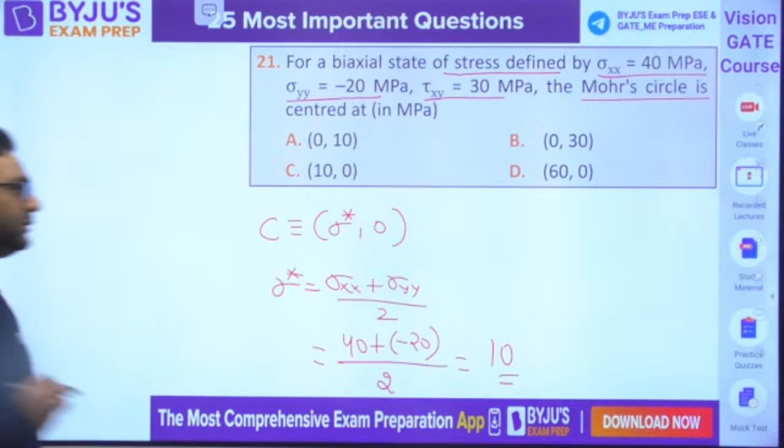Question number 22, this is from the velocity approach. You can do it from the engineering mechanics point of view also, using the concept of instant centers. Instant center is also part of engineering mechanics, not only theory of machines. If the velocity direction is this, you will sit perpendicular to this, like this. It will come down perpendicular to this, and this is the instant center you will have. So velocity of t is given, which can be written as ti into omega ts or st. This is 6 meter per second. Ti, if this is 30, you can very easily write ti and you will be getting omega st.

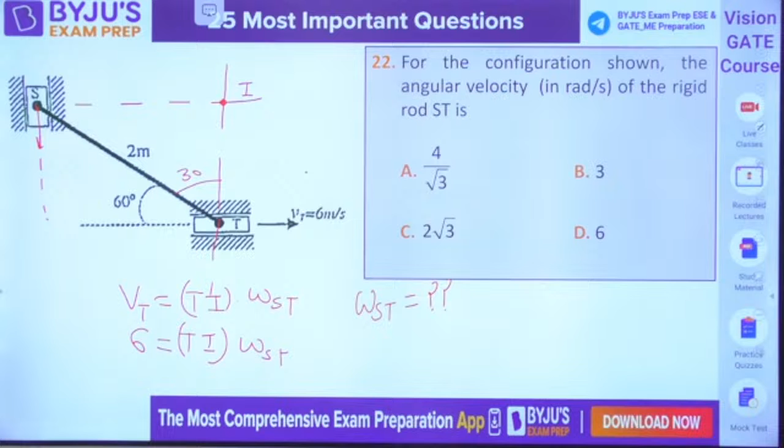Only 3 more questions are left. You need to find out omega st. Use the triangle. This is 2 meter, so this is going to be 2 cos 30. You can use it. Yes, C is the right answer. You will be getting omega st as 2 root 3.

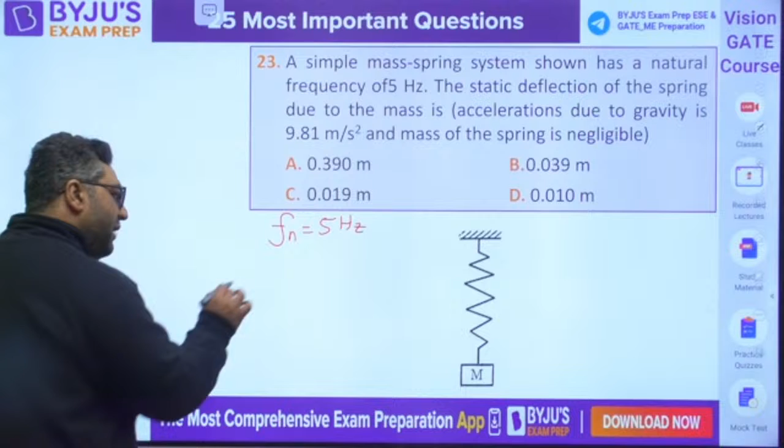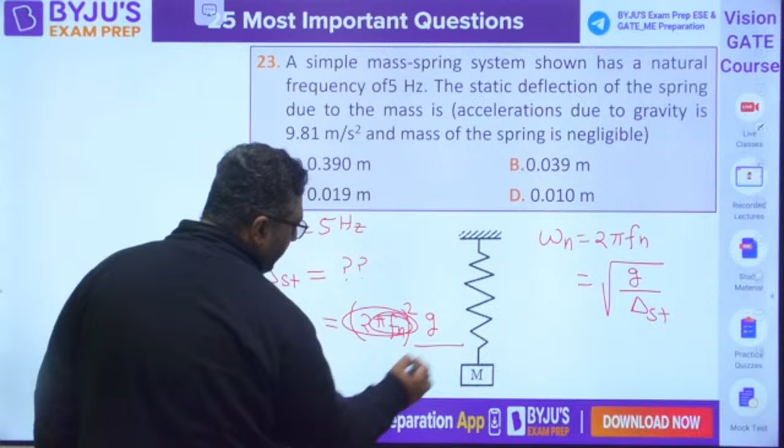Very good guys, very good. Moving to question number 24. 24 and 25 are from theories of failure, last two questions from my side.

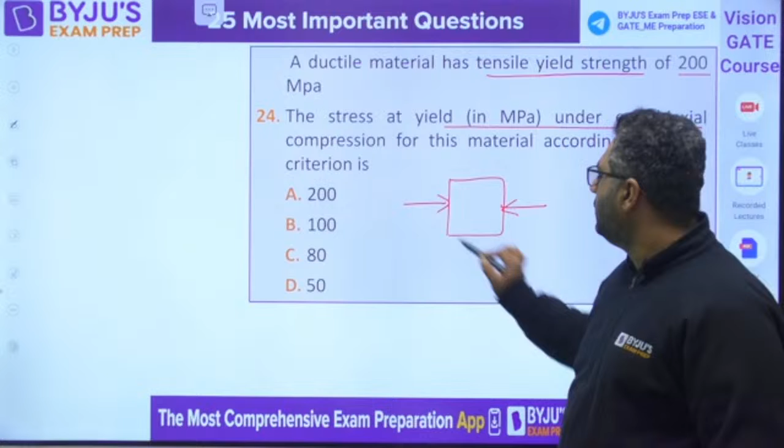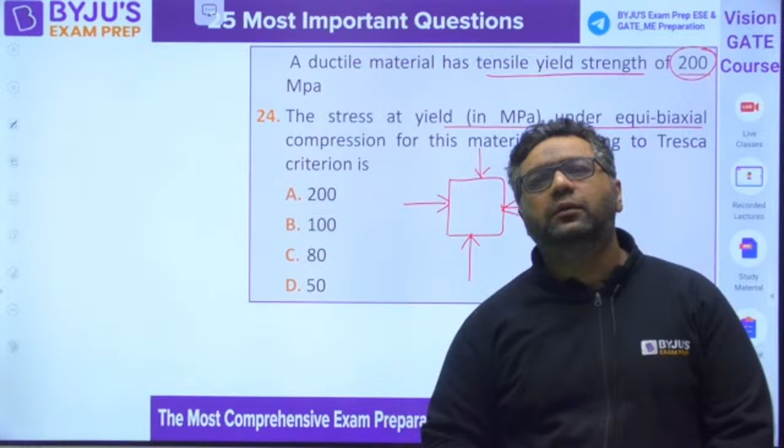A ductile material has a tensile yield strength of 200 MPa. You need to find out, for this case, if normally SYT is this, then the stress at yield under equibiaxial compression for this material according to Tresca will be. Try to solve it, guys. First of all, check if this is same nature or opposite nature of principal stresses. For same nature, Tresca gives the same answer as Rankine. So as this is same nature of principal stresses, the answer here will be 200 only. This is the case when Mohr circle will be a point.